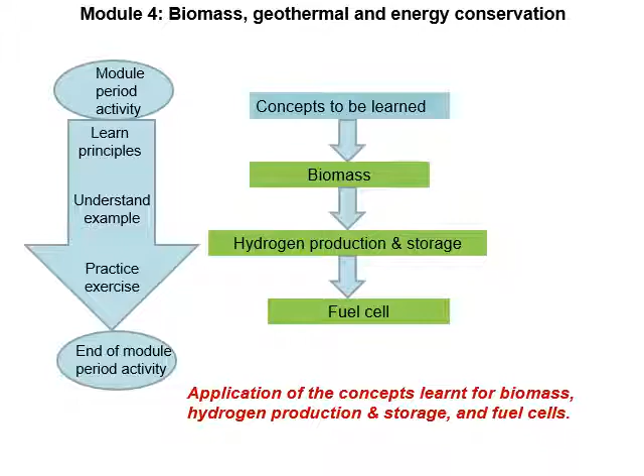Let me start the first part of this week, week 11, with biomass. As a definition for biomass, we have much waste coming from agriculture sector, from animals. These are organic, bio issues, as example tree, plants, fiber, animal waste. We can use them to convert into fuel, methanol and biodiesel, or even use them to produce biopower, as we will explain through our discussion.

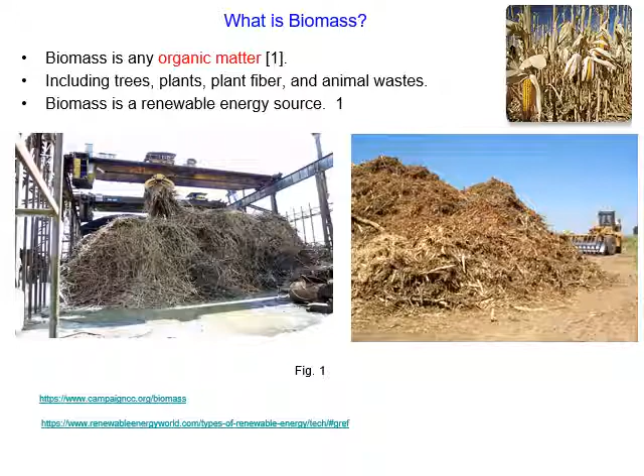Anywhere on this planet, any location you select, you will find there is some waste coming from this location. This waste, as shown in the figure here, can be converted into energy fuel, and we'll explain this.

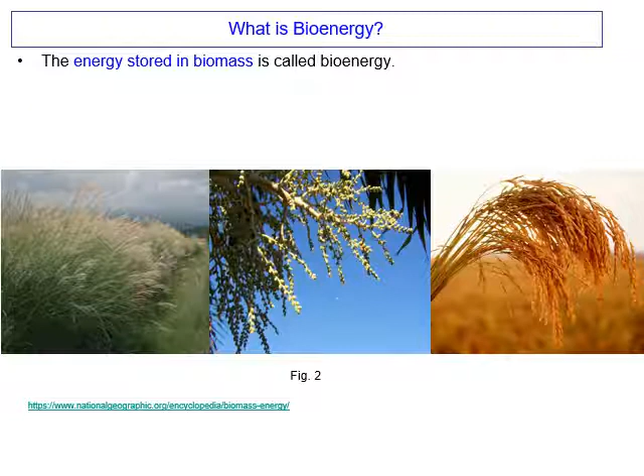I will take an example from the US since they have a huge investment in this type of renewable energy. By the way, it's renewable because the consumption is lower than the production; production is higher all the time. Now, the energy stored in the biomass, we will convert it into heat, or produce fuel, or even generate electricity, as we will discuss today.

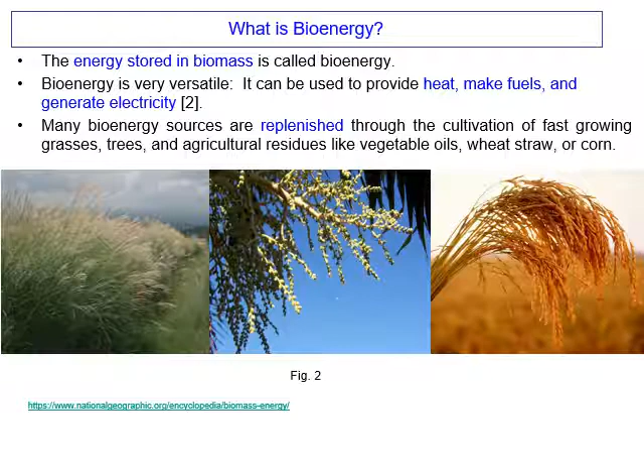Many types of waste, or let me say raw material, as example vegetable oil, can be used to produce biofuel. There is a plan in the United States of America to convert half of their national gasoline using biomass, and there is also a plan to invest in advanced research on algae to convert them into biofuel, with the goal of approaching zero importing of oil or fossil fuel from outside the US.

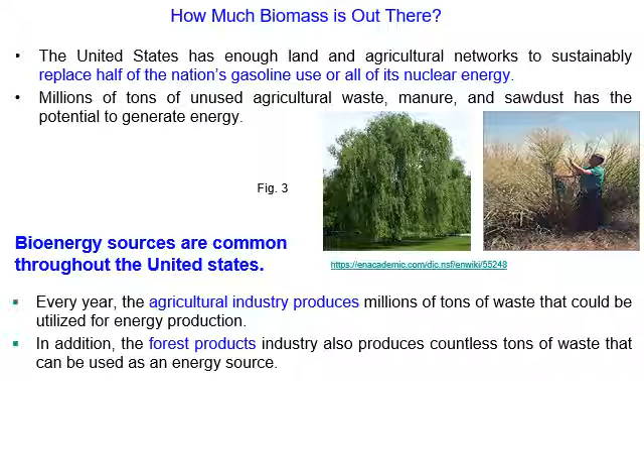Million tons of waste coming from agriculture, as example sawdust and other waste, are converted into electricity. They generate fuel also for vehicles and transportation and so on. Agriculture is the main sector which produces this biomass, and also in the forest, the products, tons of waste coming from the forest.

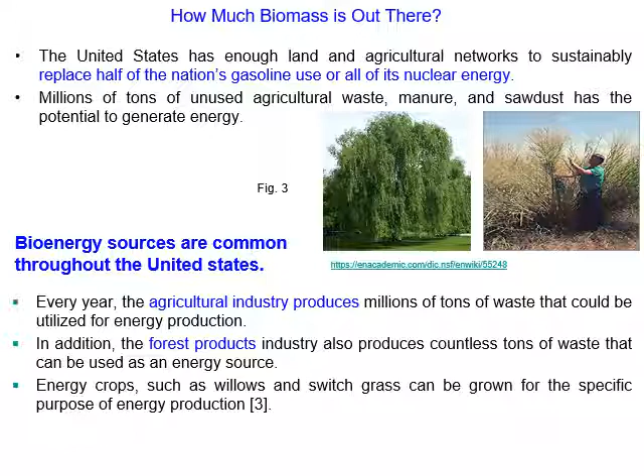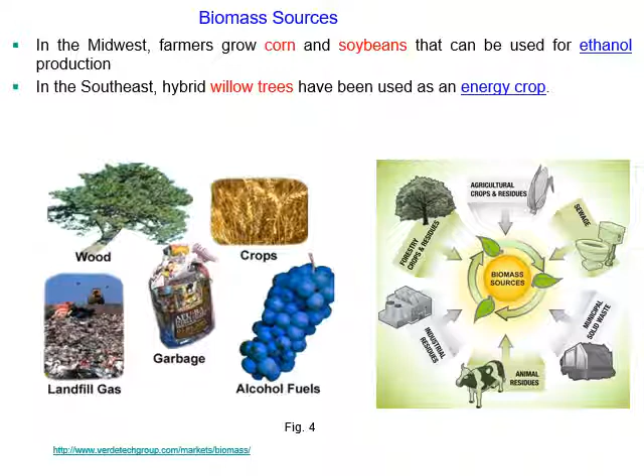The source of biomass in different places in the US: we will see that in the Midwest there is corn and soybeans, used to produce ethanol, as we will discuss in the next few slides. In the Southeast they have willow trees, used as energy crop to generate electricity, and in the Northwest and Northeast, the waste coming from residual industry is used to generate electricity and heat.

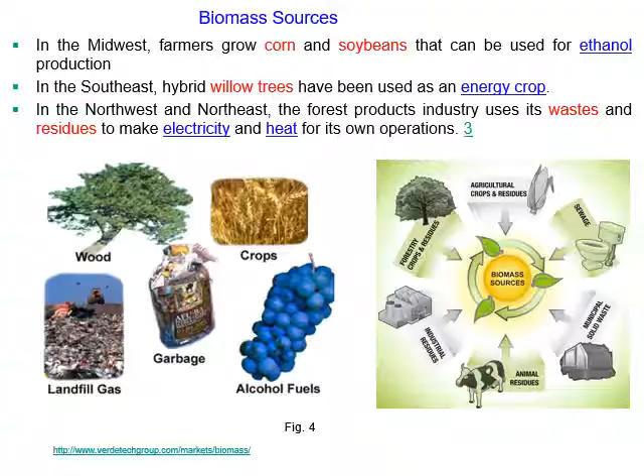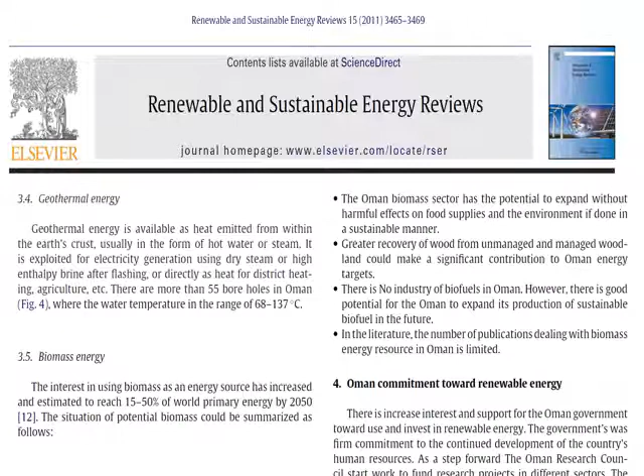I talked about this type of renewable energy in my paper published in 2011, Renewable Energy in Oman, Status and Future Prospect, in Renewable and Sustainable Energy Reviews, one of the important publishers, Elsevier. I talked about the opportunities for biomass in Oman.

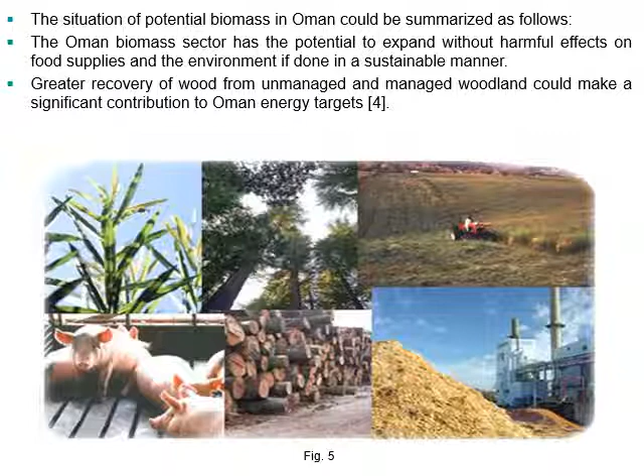I will read from my paper here. The situation of potential biomass in Oman could be summarized as follows: the Oman biomass sector has the potential to expand without harmful effect on food supplies and environment if done in a sustainable manner, and greater recovery of wood from managed woodland could make a significant contribution to Oman's energy target. There is no industry of biofuel in Oman; however, there is good potential for Oman to expand its production of sustainable biofuel in the future.

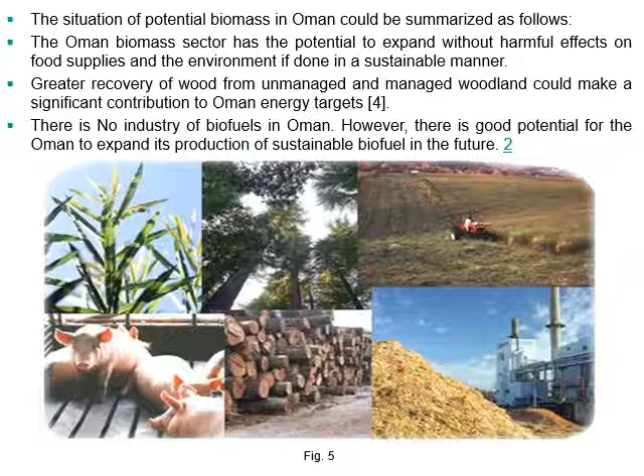Considering the 1 million palm tree project, we expect that there is waste coming from the agriculture sector and it will increase with time. This could be used to produce biofuel.

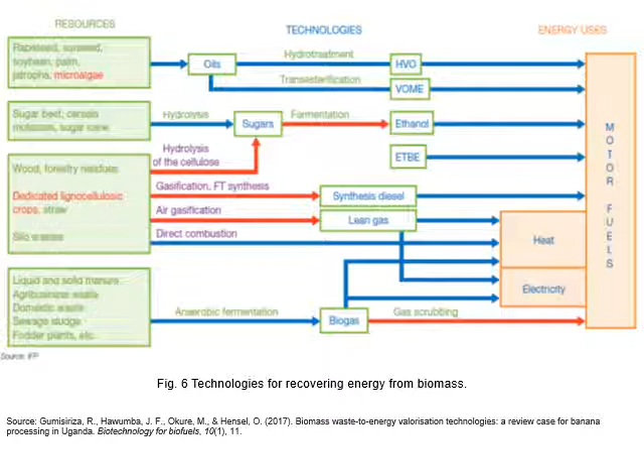Now you may ask, what is the process? Actually, we have the source, example here you can see. These sources, as I mentioned, waste coming from agriculture sector or from industry or from animals, we convert them into oil, sugar, and fat, and then we use a chemical reaction or thermal reaction or fermentation reaction to produce either biodiesel, ethanol, or we use them to generate fuel for motors or electricity.

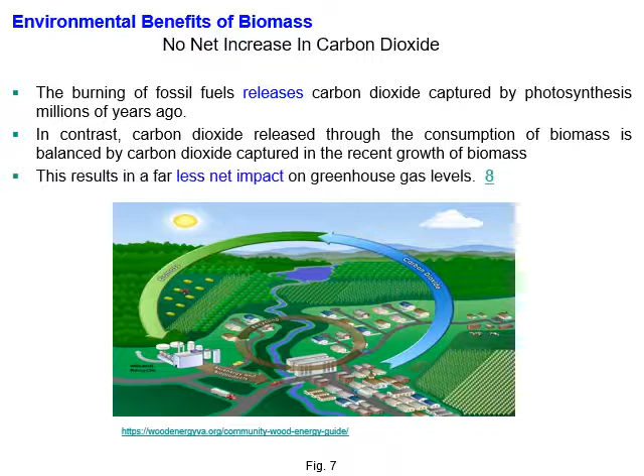Now, the burning of this fuel coming from biomass has less carbon dioxide emission. Actually, the plants absorb carbon dioxide as part of their photosynthesis process, but when we burn them, they produce less CO2. So their impact on the environment is less.

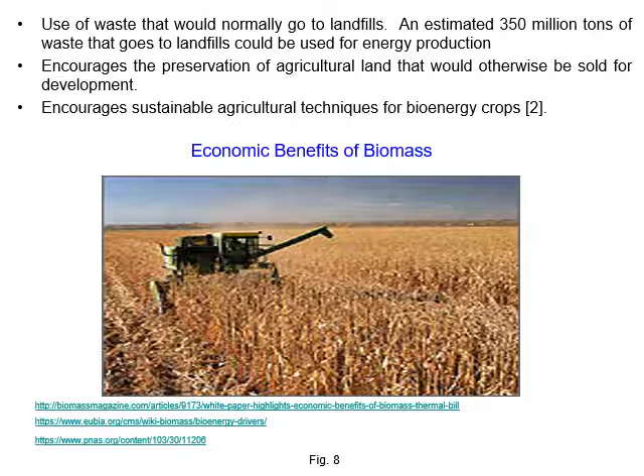Now, there are millions of tons of waste coming from the agriculture sector that could be used to generate electricity, and this will feed the economy with more investment. It means more feed to the economy. Also, it will create job opportunities, thousands of job opportunities, as I mentioned.

The U.S. spends 50 billion each year on oil. Now, biomass could reduce this to 25 billion a year if they improve this sector and replace half of it. Besides, this will create job opportunities, as I mentioned, 17,000 for each billion gallons of ethanol produced.

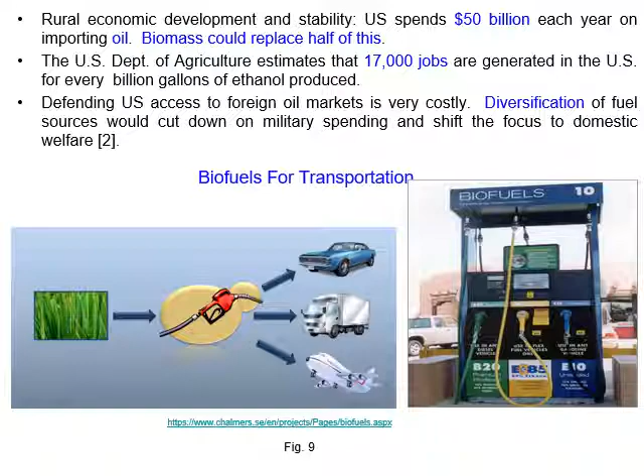And also diversification. As you know, I mentioned in previous sessions diversification by using different sources of renewable energy. We talked about solar, thermal, light, hybrid, wind, hydro, tide, wave, OTEC. Now, biomass also could be part of it. As you can see in this photo, we convert the waste coming from different sectors into fuel to be used in different vehicles for transportation.

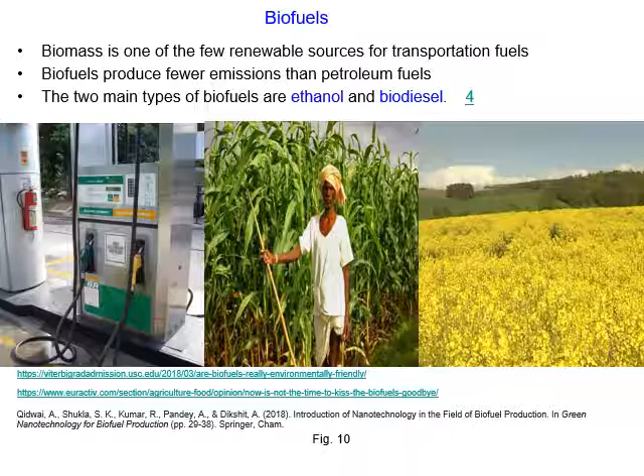Mainly today they use it for transportation, and if we compare biofuel with petroleum fuel, we can see the polluting gases emitted from biofuel are less compared with petroleum. Now, two types of biofuel are produced from biomass. These are ethanol and biodiesel. Let me talk about them one by one.

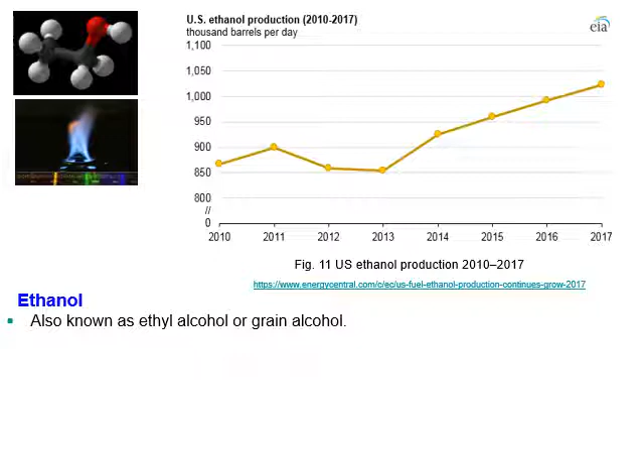Ethanol, the chemical name, is ethyl alcohol or grain alcohol. It's made from starch and sugar in certain grains, wheat, corn, or their byproducts. We convert them into sugar, and then we feed them to bacterial microbes, and the microbes use them as food.

They produce ethanol. As you can see here in this block diagram, the oil crops, grains, sugar, and other sources of biomass, we convert them into starch, fat, oil, and so on. Then we use different technologies, either chemical, biological, or thermochemical technology. Then we produce different products: biodiesel, ethanol, methane,

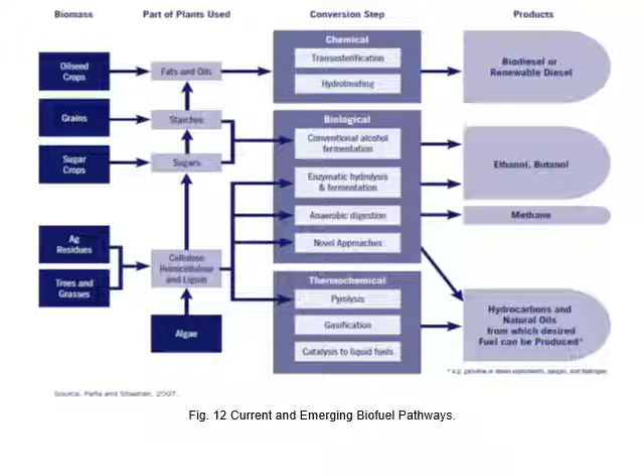and other biofuels. Now, it's preferable to have the plant or factory where we produce the ethanol close to the raw material, I mean to the forest or agriculture that provides the raw material. In 2004, U.S. industry produced 3.3 billion gallons. There is growth in producing ethanol with time.

Research is going on to improve the technology and the production of ethanol using fiber from different wastes from the agriculture sector. The ethanol in this situation is called bioethanol, because there is ethanol produced from petroleum, from fossil fuel, but this ethanol is produced from biomass. They call it bioethanol.

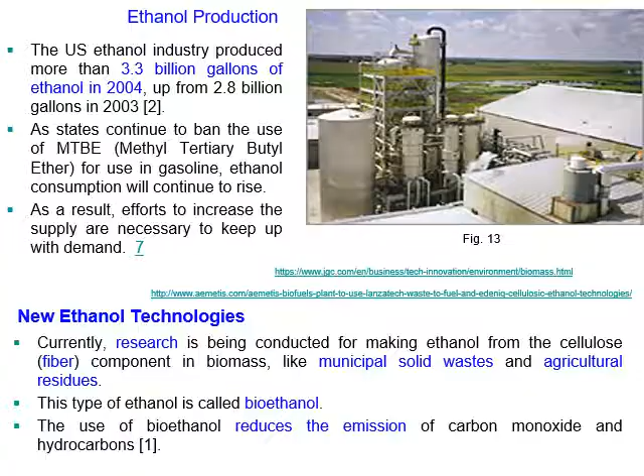The carbon monoxide emission from bioethanol is lower than that from ethanol coming from fossil fuel. It's used to supply many vehicles; the US used more than 1.5 billion gallons for transportation in different vehicles. 10% ethanol and 90% gasoline. They use it for transportation.

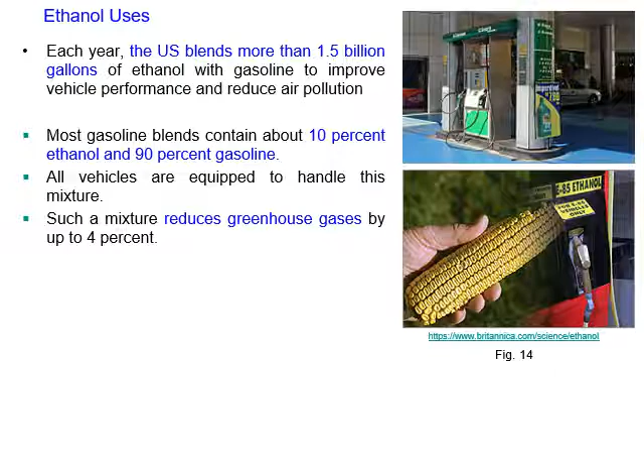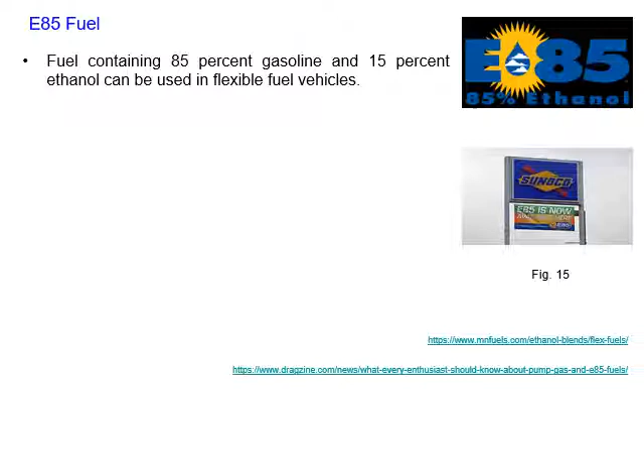Now, these vehicles are flexible vehicles. They can use ethanol coming from biomass or from fossil fuel. And the new fuel is called E85. E85 means 85 gasoline and 15 ethanol. It's used in what we call flexible fuel vehicles, which can use different types of fuels.

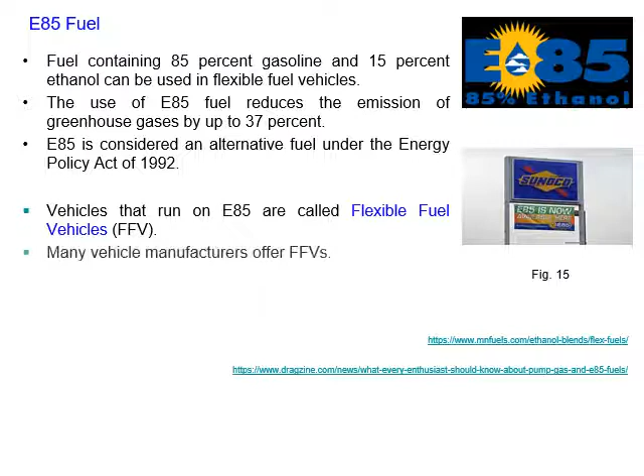Now, using E85 reduces greenhouse gas emissions by 37%, and this is important because it's in the same direction of reducing carbon dioxide emission. And the vehicles are called flexible fuel vehicles. Different manufacturers, Ford, GM, Chrysler, Mercedes, developed and improved their vehicles to deal with this type of fuel, either E85 or normal fuel coming from fossil fuel.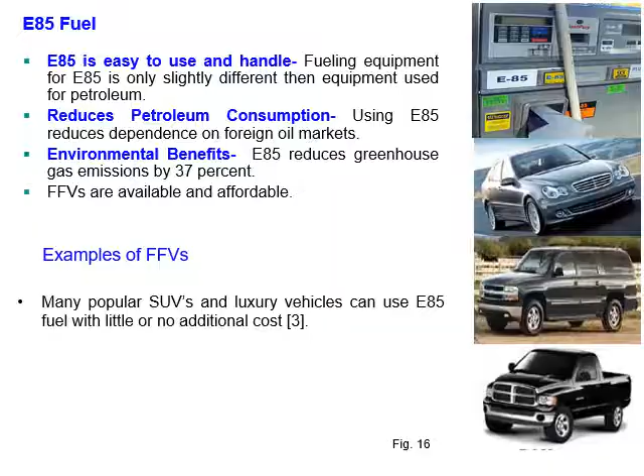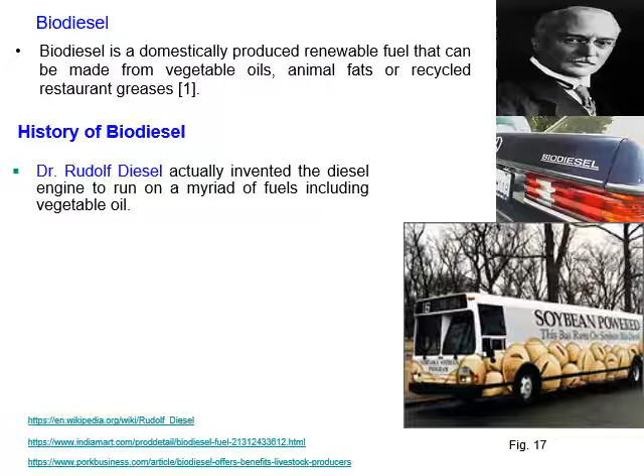Now, the other one is biodiesel. Biodiesel is produced from vegetable oil. And Rudolf Diesel, the scientist who produced this, mentioned in 1911, more than 100 years back, and I will quote him here: the diesel engine can be fed with vegetable oil and would help considerably in the development of agriculture of the countries which use it.

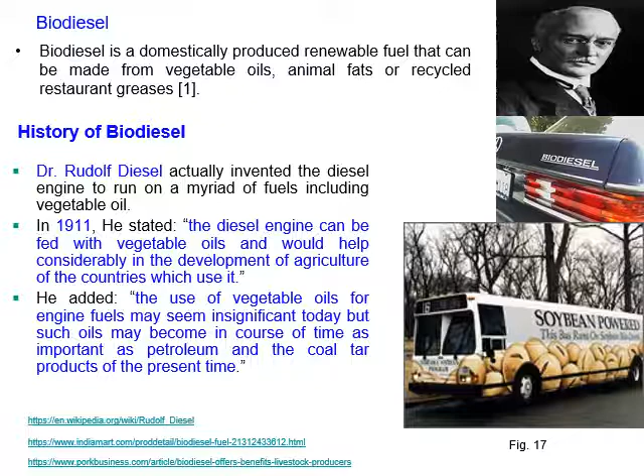And in another quote here: the use of vegetable oil for engine fuel may seem insignificant today, but such oils may become in course of time as important as petroleum and the coal tar products of the present time. When we read from Dr. Diesel what he said more than 100 years back, he predicted the future. Today, biodiesel has become one of the important sources of fuel used for transportation, and many countries depend on the production of biodiesel.

Now, we are not talking about producing a small amount of biodiesel: in 2010, 200 million gallons just from soy-based biodiesel in the US. Now, biodiesel has increased. By the way, the emission coming from biodiesel is also lower than from diesel produced from fossil fuel.

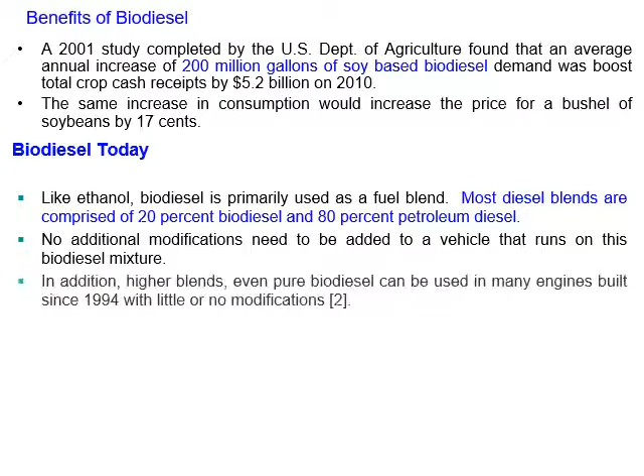Now, many companies try to mix around 20% biodiesel and 80% petroleum diesel. I mean, rather than producing diesel from only fossil fuel, they try to use it from bio. So they reduce the pressure on using fossil fuel. It's a mix of diesel, bio with non-bio, fossil, let me say.

Now, usually biodiesel is made from fat and oil. So we can produce fat, and they deal with it chemically, and they produce fatty acid methyl ester, which is the chemical name of biodiesel. Okay, with methanol, definitely they mix it.

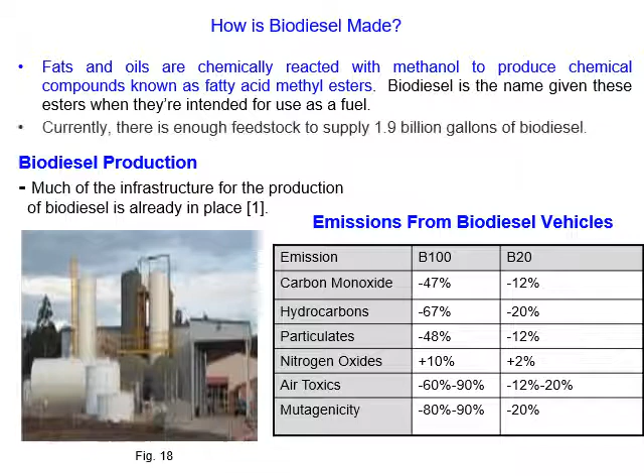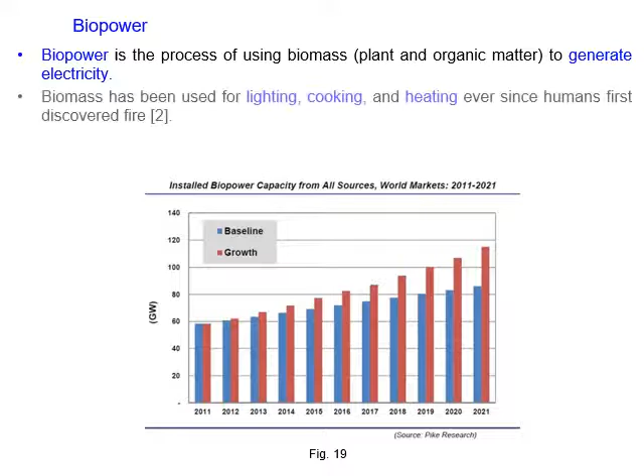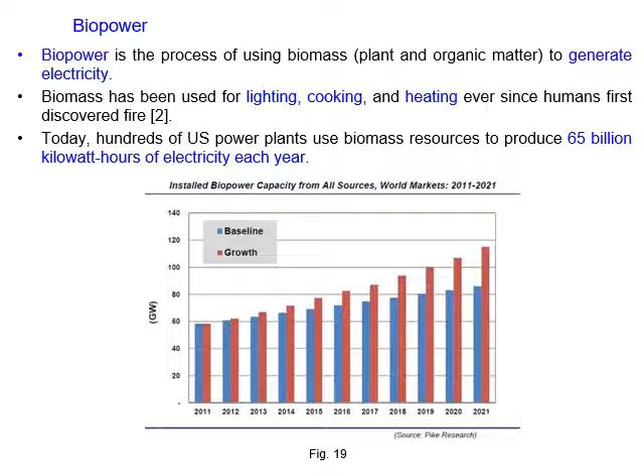Now, another one is biopower. Biopower is when we use biomass to generate electricity. Definitely we use biomass for lighting, cooking, heating, but also to generate electricity. It's increased with time. Many companies started to invest in this. In 2010, they produced 65 billion kilowatt hours of electricity each year, and it's growing. Now in 2021, it's approaching 110 gigawatts of production from biopower.

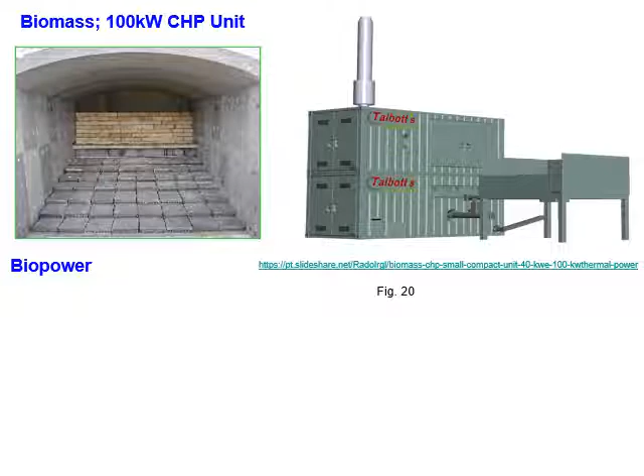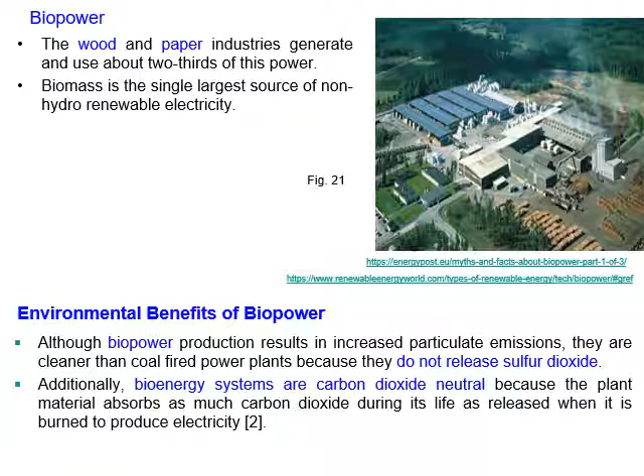The plants for this are either in the range of 100 kilo combined heat and power or more, talking about mega, okay. And biopower sometimes uses a mix of renewable and non-renewable, as we'll explain in the next point. Biopower mainly uses wood. The electricity produced may be used in the wood and paper industry.

Okay, there are three types of biopower system: direct fire, co-fire, and gasification. For direct, we burn the biomass directly. So it's similar to any other thermal system. We produce heat, we convert water, or let me say liquid, into steam, vaporized, and then we rotate the turbo generator, as you can see in this figure.

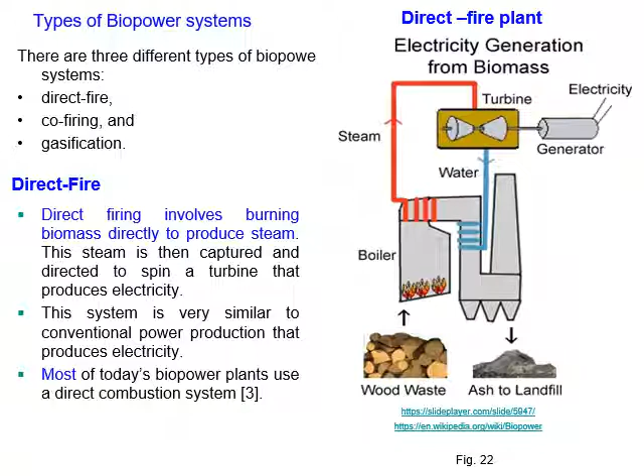For co-firing, we mix the biomass material with the fossil fuel to reduce the pressure on fossil fuel. It's similar to the previous system, but remember here also we reduce the carbon dioxide. Sulfur dioxide will be reduced sharply because it's not produced from biomass; it's produced from fossil fuel.

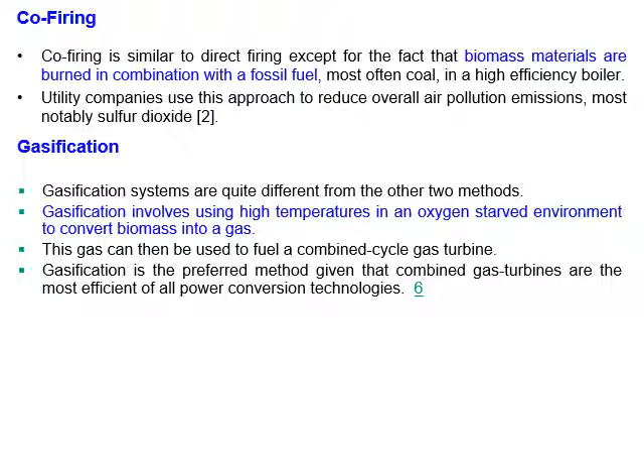For gasification, the situation is different from the previous two methods. In gasification, they heat the biomass to produce gas, and this gas is used to rotate the turbo generator, as you can see here. They heat it, okay?

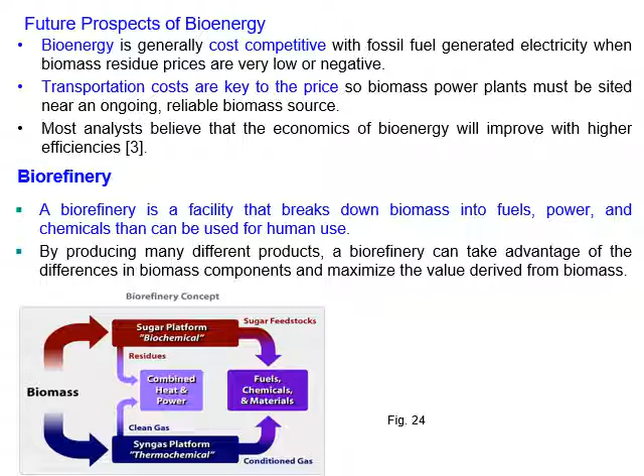Another issue is the biorefinery. We know the fossil fuel refinery. A refinery breaks down the raw material into different types of fuel. Almost the same thing happens here with biorefinery. We try to produce different types of fuel, power, chemicals, and use them for different applications. Okay. The cost will be reduced sharply if we locate our biorefinery factory close to the biomass source, near the forest, near the agriculture sector, and so on.

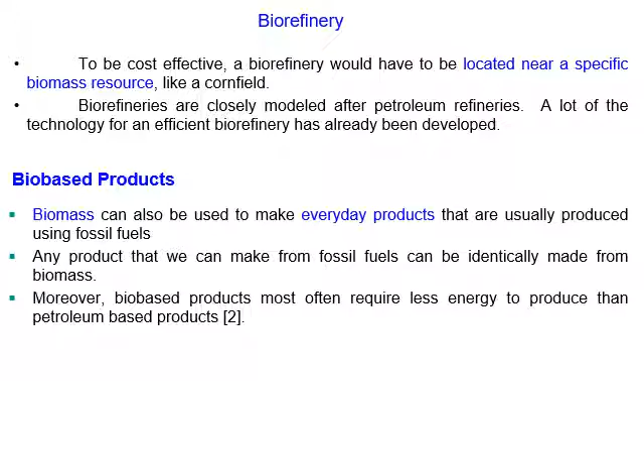Now, bio-based products. You remember when I mentioned oil in the revision of fossil fuel, there are some applications using fossil fuel, the oil-based technology. I mean, some products using oil, or fossil fuel, petroleum. Now the same thing for biomass. There are also products based on biomass, almost similar to the situation of fossil fuel.

Okay, I will stop here. We will continue with hydrogen production and fuel cells in the next session. Thank you.